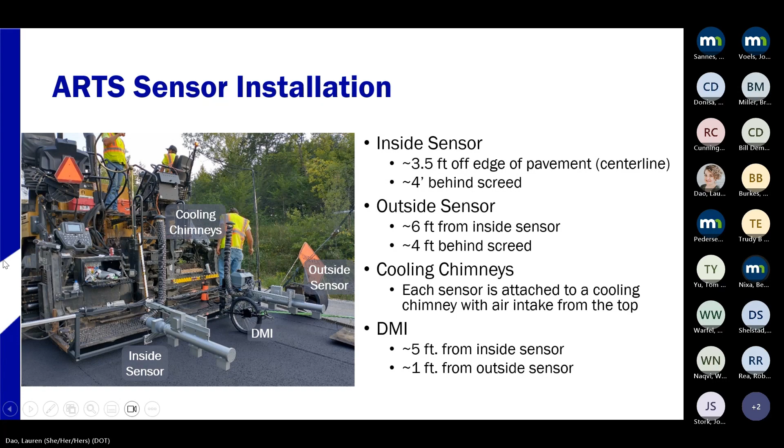There are two demonstration projects, one in Iowa and the other in Wisconsin. The project in Iowa was a county road in really bad shape in terms of surface condition. You can see the road is unraveled and patchy. It had a very hilly terrain, a lot of changes in elevation, and too many curves. The project in Wisconsin was a regular highway, a fairly flat terrain without too many curves. So we got to test two different types of projects here.

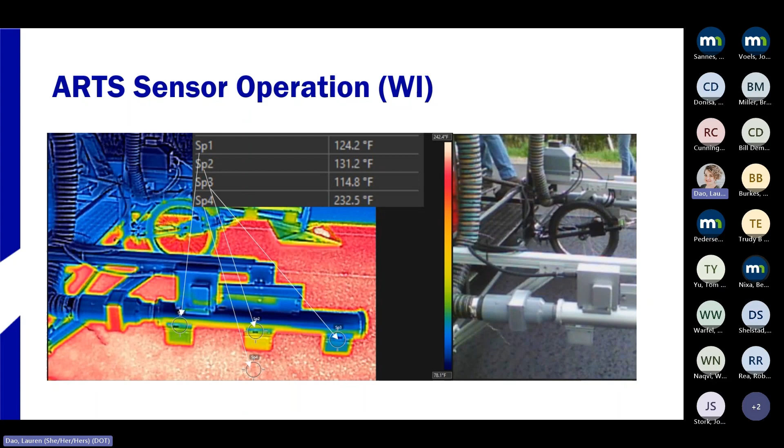Here is the same sensor in operation in Wisconsin. The asphalt temperature again is about 235 degrees, and the sensor housing reports a much lower temperature.

So post the paver operation, after the finishing roll is done and the asphalt is cooled down, we also profile the exact same location with a high-speed inertial profiler, just to compare the results of how it was behind the paver screed and how it turns out after the compaction is done.

This was a proof of concept project. There weren't multiple types of sensors tested or anything of that sort. It was just to see if we could get a system that could do real-time smoothness measurement for asphalt. And we must say that we did succeed in that.

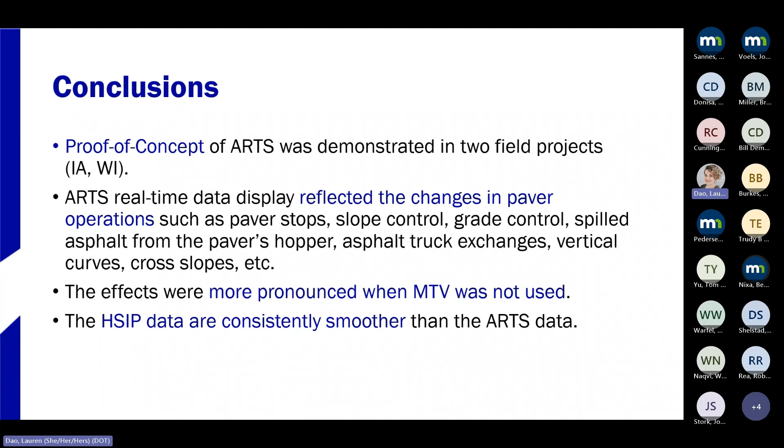Overall, we had good success using this setup. We were able to maintain the temperature inside the sensor below 120 degrees by cooling the system, and the installation process was also quite straightforward.

Some of you might have noticed that the DMI between the two sensors was leaving a small tire indent behind the paver screed, but that was only visible right behind the screed. Once compaction was done, we couldn't even see the line caused by that.

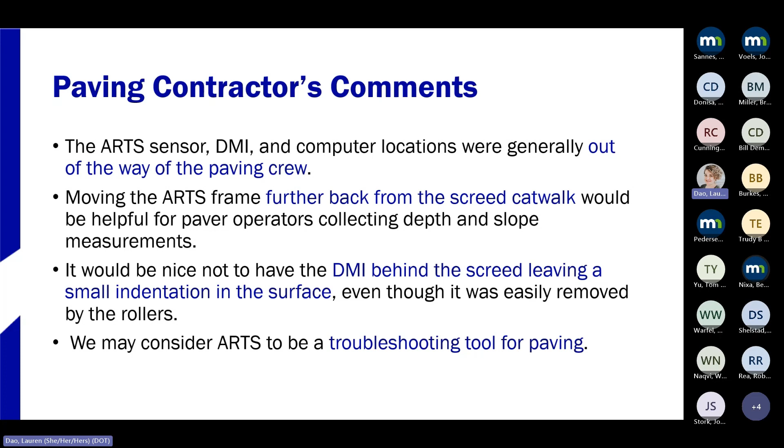Finally, the most positive feedback here is that they would consider this as a troubleshooting tool, that they are interested in seeing a real-time smoothness, and being able to tweak the paver operation is beneficial to them.

So for the future, the recommendations here are to see if we could put the sensor not on the screed but somewhere on the main frame of the paver itself. Therefore, we don't end up with issues with large screed movements affecting the results.

We would also like to do more controlled experiments with the new setup, where you change the tow point to see if that affects your roughness. You induce events such as paver stops or truck exchanges, or expanding or retracting the screed, etc., to see if that affects the roughness measurements in real time.

And finally, we would also want to make changes to the paver settings itself, to see how each change would affect the smoothness test.

More details about this project and the recommendations themselves can be found in the report, which is online right now.

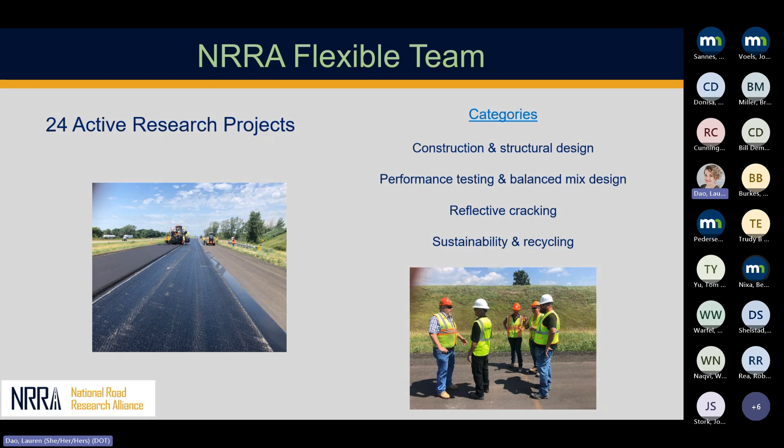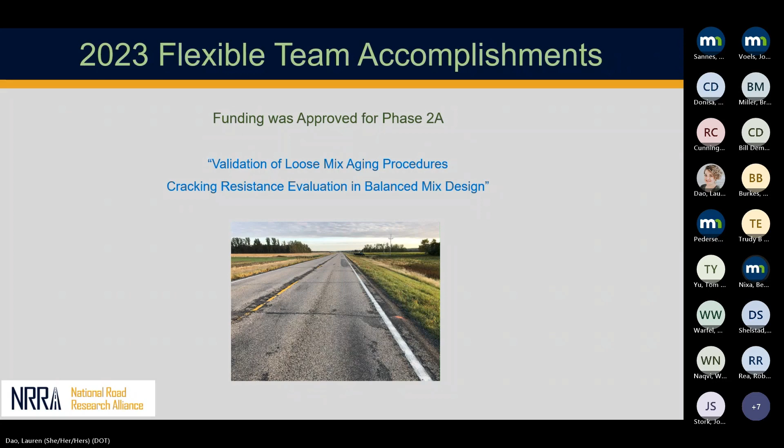I just wanted to say thank you to all the flexible members for all the good ideas that you've come up with and turning them into sound research. And then it gives us, the agencies, something to bring back to implement. That's really what it's all about. So I want to thank Jeff and Ben for their leadership, and Lauren for coordinating all the NRRA stuff we do and making the website so navigable, real easy to get through. And also want to thank Michael for his help, he greatly assists me in all my duties as the chair.

So now I'm going to introduce Dr. Sias. Dr. Sias is a professor in the Department of Civil and Environmental Engineering at the University of New Hampshire. Her research focuses on characterization and modeling of asphalt materials and pavements, specifically with respect to recycling, cracking, and aging, and on the impacts of climate change on infrastructure. Dr. Sias is a past president of the Association of Asphalt Paving Technologists and is editor-in-chief for Road Materials and Pavement Design. Her presentation is Mixed Rejuvenator Test Sections, Phase 2. Please welcome Dr. Sias.

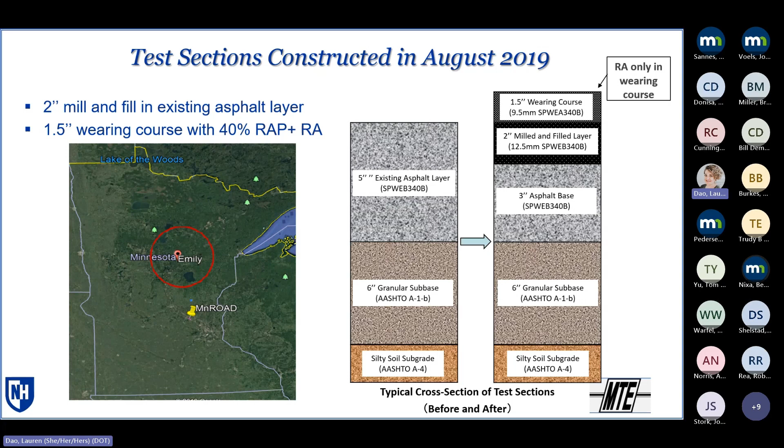This was all done with field produced materials. Test sections were constructed at the end of August 2019 up in Emily. It was a 5-inch asphalt layer with 2 inches of mill and fill, and then a 1.5-inch wearing course put down on top. The wearing course had 40% RAP plus each of these different 7 materials, and there were control sections that went along with it. So the RA section materials were just in that wearing course.

The section materials, again, there's 7 different RA products. These were added to 40% RAP mixes, and the dosage was determined by the suppliers. The target was making sure that with that 40% RAP, you met a PG minus 34 target. So those dosages were set, and again, the target was based on the extracted and recovered binder.

So we've got the 7 test sections with the 7 different products, and then there were 3 control mixes: a 30% control mix, which is the typical material used on the rest of the project out there, and then 2 40% RAP sections for the 2 different days of production that didn't have any rejuvenators in them. So 2 different controls - the typical one, and then the 40% to directly compare with those. You can see the dates of the paving on those.

Now, one thing to note when showing the results - as we got into the project, the results for the second day 40% control mixtures just weren't making sense. Something wasn't right with the material we had. All of that data is shown in the reports, but what I'm showing today, we've dropped out of the direct comparison. We looked into some of the production and plant information but couldn't figure out what had happened with these materials - obviously it wasn't a good comparator. So we're sticking with just the day 1 materials. You'll notice those aren't on here, but they are shown in the reports online.

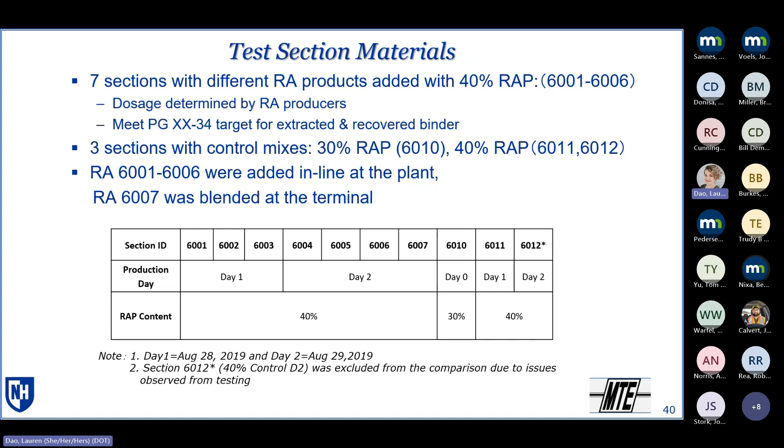In terms of the overall project tasks and status - again, all of these task reports are available online - we started with a literature review and interim annual updates for the first year, and after the second and third year materials, a summary of plant produced mixture testing and binder testing. The final report, we're in the process of finalizing, and that should be out for the TAP to review in the next couple weeks, and then published probably sometime early summer.

So in terms of the testing that was done, these materials had basically the kitchen sink thrown at them. We did almost anything we could that was available at the time looking at these materials. Some of the testing was done by various NRRA agencies, and a lot of the further testing for the aged materials was done at UNH. You can see a list of the different mixture tests that were completed, and then the binder tests - most of the binder testing was done by MTE, and again a lot of different binder tests were done on these materials.

Now, it wasn't just the plant produced material - we did a whole bunch of different aging conditions, so very comprehensive work in terms of the data we've collected here. For each of the test sections, we've got the plant produced loose mix, and that loose mix we tested in the reheated condition, 6 hours at 135 degrees C, and long-term aging, which was determined at the beginning of the project as one long-term aging condition.

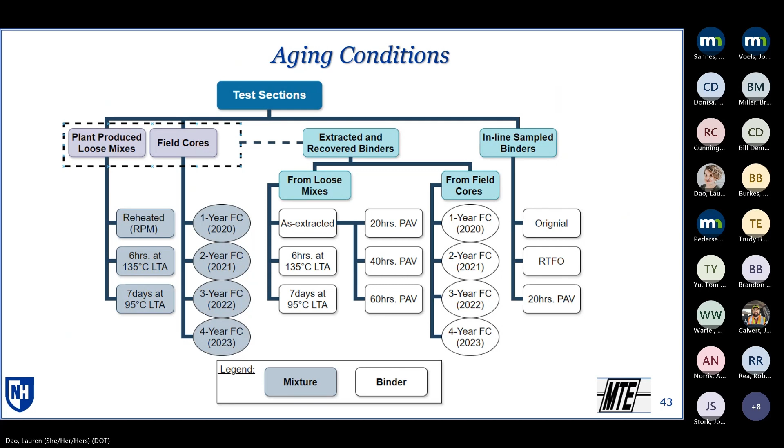So getting into some of the results, and again, not showing everything, but you will see everything in the final report. And if you're interested in some of the intermediate results, you can access them now online.

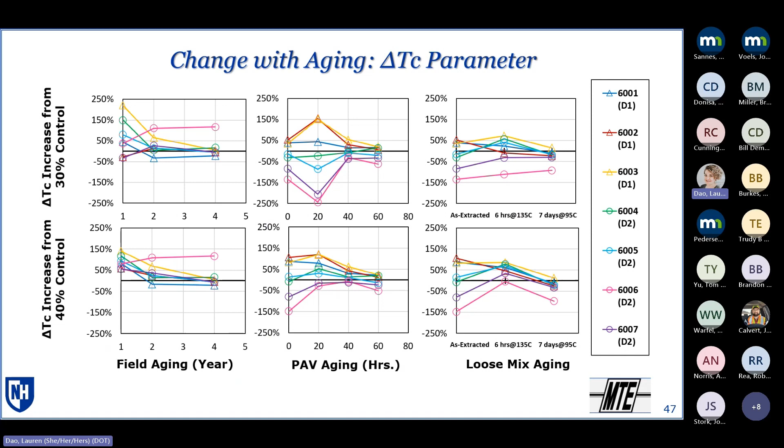Showing how these are changing with the aging, same setup here. With the field aging, things are staying relatively constant. With respect to the 30% control versus 40% control, you're seeing those coming a little bit closer. With the PAV aging, there are obvious trends in terms of what's happening, and then same with the extracted and recovered from the loose mix aging.

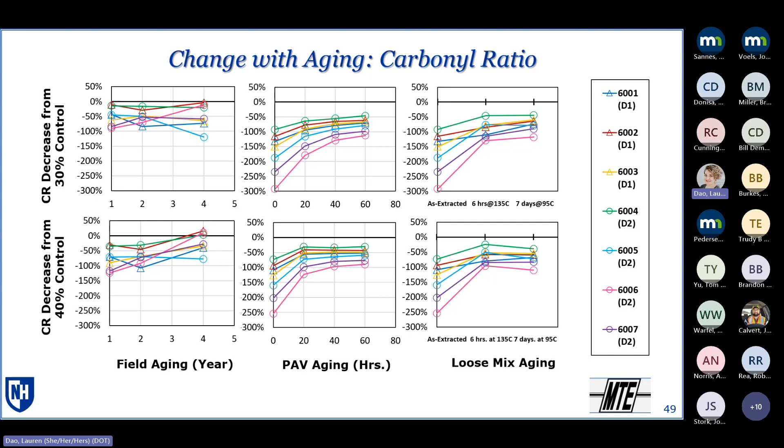So that's just a quick snapshot of some of the binder results. Some of the mixture testing results - we'll start with some of the rheological properties.

Looking at the Glover-Rowe mix parameter, this is very similar to the Glover-Rowe binder parameter, where it's a combination of a modulus and a phase angle value at a certain temperature frequency combination.

I will note with the mixture test, because we're testing some of the field cores, and the field cores have variable air void contents, to allow us to compare these, we did an adjustment of the rheological properties all to 7% air voids. So all of the lab testing was done at 7%, field cores variable, but we adjusted all of these to 7% to allow for a better comparison. So all of the rheological mix properties are adjusted.

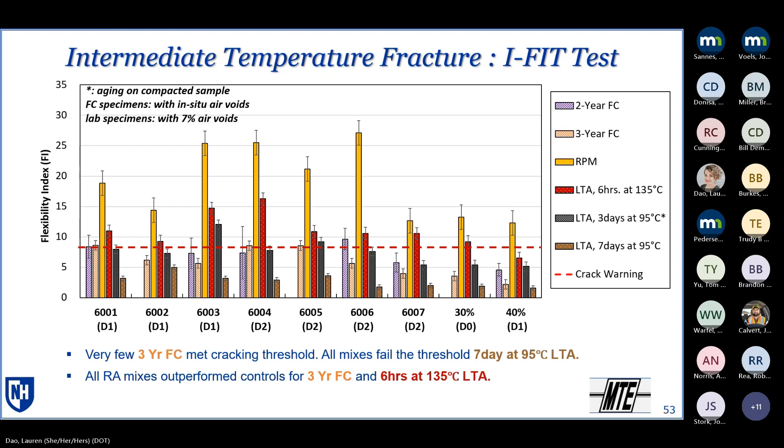You can see this specifically with respect to the control values, and as we're starting to get field aging, you're seeing bigger differences, and then again with lab aging as well.

Finally, the low temperature fracture test. This is a DCT test. The parameter I'm showing is not the fracture energy, but the post-peak index, PPI value, which is a combination of fracture energy and parameters from the post-peak slope. So it's more similar to what you're used to seeing with the flexibility index.

With these, we're not testing field cores, but we have the reheated plant mix and the two long-term aging conditions. The test temperature corresponds to the test temperature at the site location plus 10 degrees C. And again, all of these are 7% air voids.

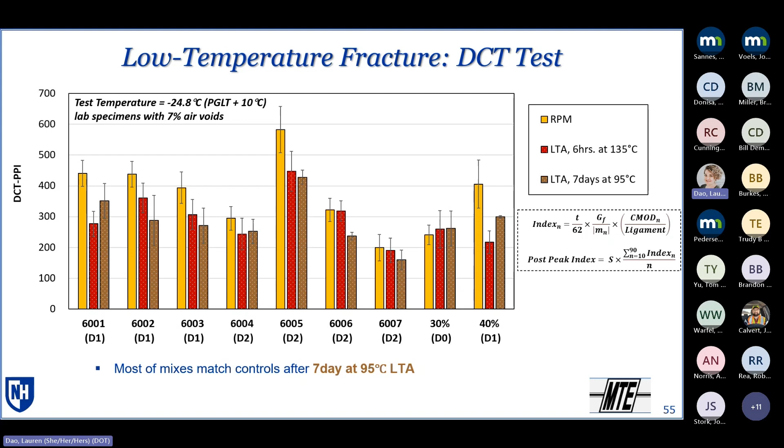You can see most of the mixes are either better than or matching the controls once we get to that long-term aging, and we're seeing what we expect in terms of the decrease with aging over time. You can see the plots here with respect to the 30% and 40% controls with those different aging conditions.

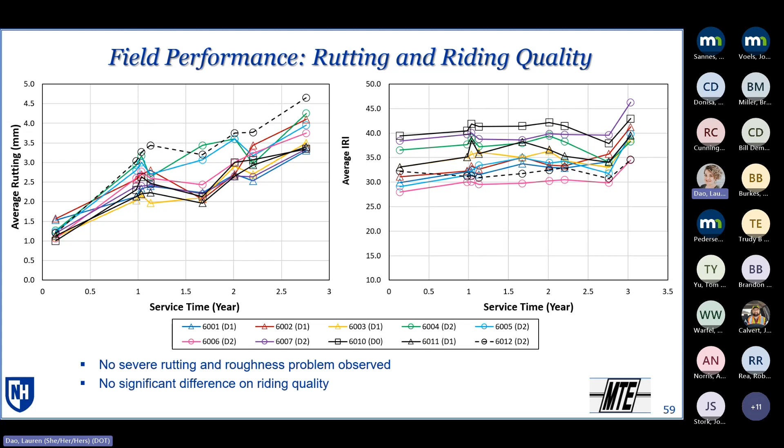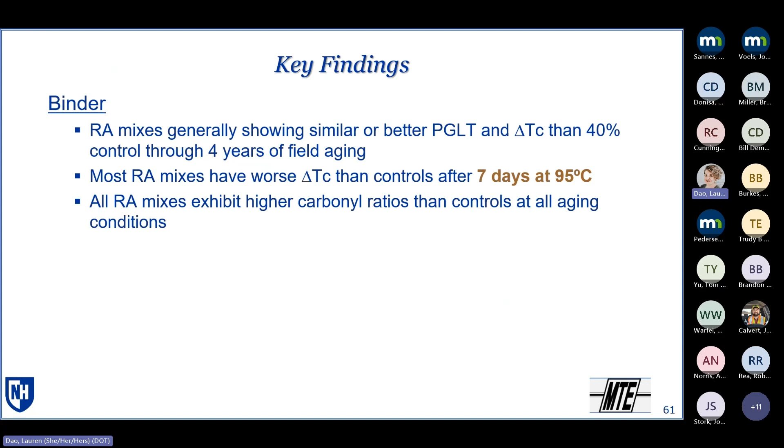Summarizing what we found so far from this phase of testing: from the binder testing, our RA mixes are generally showing similar or better PG low temperature and delta TC than our 40% controls through the 4 years of aging. When you look at delta TC, they're a little bit worse, especially with that longer term aging, and as I mentioned, they've got the higher carbonyl ratios for all the aging conditions.

From the mixture testing, most of those RA mixes are still showing better performance for the 4-year field cores and for the 7-day aging. For intermediate cracking thresholds, once we get to those longer term aging conditions, everything's basically hitting the bottom. Generally those RA mixes have better values than the controls, but once you're below the threshold, nothing's really any good. The RA mixes initially show better low temperature properties, but that's diminishing with increased aging.

For field performance, all the mixes are showing better cracking performance than our 40% control, a little bit worse than the 30%, but again, not a whole lot happening out there, so we really need to keep monitoring these over a few more years to see if we start seeing any differences distinguishing field performance. In terms of looking at the aging protocols, this wasn't a main objective of the study, but a side objective, since we have all this data, is what represents what we're seeing in the field.

That 7 days at 95 degrees C definitely is more severe than what we've seen so far with the 4-year field cores. The 6 hours at 135, based on the different binder properties and mixture properties we're looking at, is really looking for materials comparable to 3 to 4 years of aging in the field, and that's based on the top half inch of the field core.

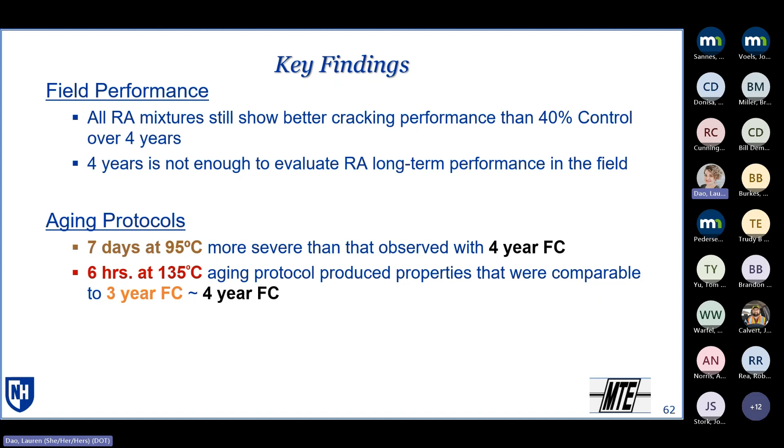So in terms of what we're looking at going forward, we're continuing monitoring into the next phase of this project. We've got a few more years of field performance monitoring, collecting the field cores, continuing to do the modulus fatigue testing. We're going to be collecting additional cores so we can do additional IFIT fracture tests on these field cores, and then continuing to do some analysis. It's really a fabulous set of data that we've got with the binder and mixture testing to really look at lab and field correlations.

And that's it, that's what I've got as a summary. So thanks for your attention, and happy to answer any questions that folks have.

Any questions? I'll take it. Great, thank you Joe, very good presentation. I think up next now is Raul, I believe. Geotechnical. You, sir.

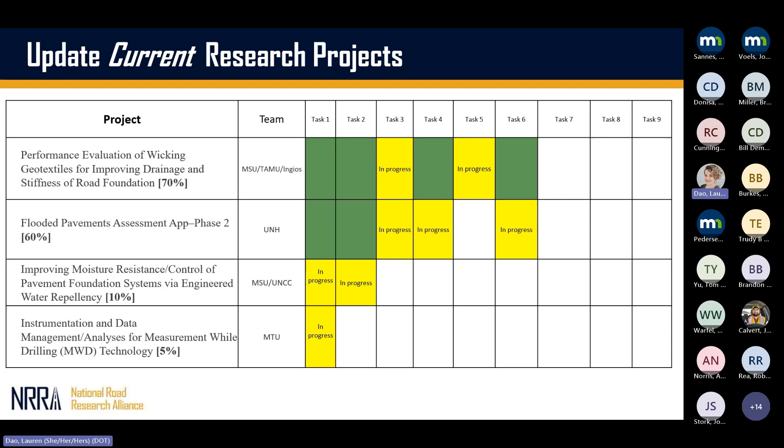The third one, on the use of water repellency, I have a few slides on that project, but I was relying on Professor Daniels being here. I'm going to put him on the spot.

So I was working on getting these slides, and I saw this chemistry. I was very bad at chemistry in high school and college, and I'm still bad, so I'm not going to pretend that I know exactly what this organosilane and all these connections mean. But anyway, the idea is to modify the water to make it hydrophobic and to have this coating in your base material that will allow the water not to penetrate into your pavement system. Professor Daniels, do you want to make a few comments on your project?

These slides, 3 slides. I'll be surprised which slides are there. So it's sort of like ad lib as we go.

Well, I want to be brief. I know we have Fyaz coming up, plus there'll be an opportunity during the tour. So maybe I'll say enough to entice you to jump in the car and come to the MnROAD facility and help us troubleshoot, because we also have some field relevant activities going on in terms of premature pavement distress connected.

But anyway, the general concept is, as Raul says, keeping water out of the system, and there's lots of different ways of doing that. Our research vision generally is to be manufacturer agnostic and focus on the organosilane chemistry itself. So much like you have a whole potpourri of geosynthetic manufacturers out there, likewise there are a lot of producers of organosilane. We do have a particular product we're using out there, but everything we do is intended to generalize how you quantify hydrophobicity.

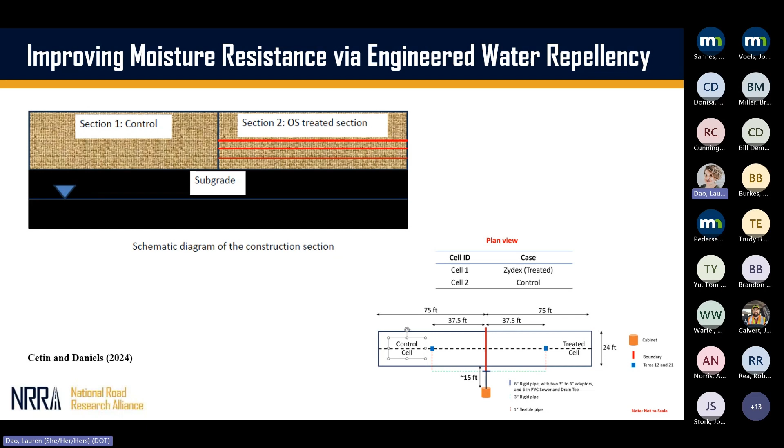You don't have to wait any particular period of time. It ought to dry on its own. You can do that, or what we did here, which is a little bit more cost effective, is simply spray it. This is analogous to some kind of tack coat, although you're not actually sealing it, you're only treating the individual particles.

And then you can see this is what that actually looked like. So here's our treatment of the 3 layers, and then we have instrumentation in between. And I'm going to take my cue on how quickly you advance those slides as I exit stage left.

But hope to see you this afternoon. We did practice this, so this is awesome. Thank you.

The other project that I'm very excited about is on measuring while drilling, or MWD. What I'm excited about is it's a hot topic right now. Federal Highway is promoting this practice. The idea, for those of you not familiar with this, is basically instrumenting your geotechnical rig so it senses more.

So you're more efficient during the drilling process. You may argue that drillers have so much experience, and they know, they feel it, and they can sense when you're doing a good job, when you're in a specific formation, if you're having trouble drilling. They don't know this sensing.

But I'll argue that as a designer, this data coming out from this additional sensor is going to help us out, really assessing strength parameters, stiffness parameters, non-uniformity across that. So that's really, I think, what is the game changer with this technology, measuring while drilling.

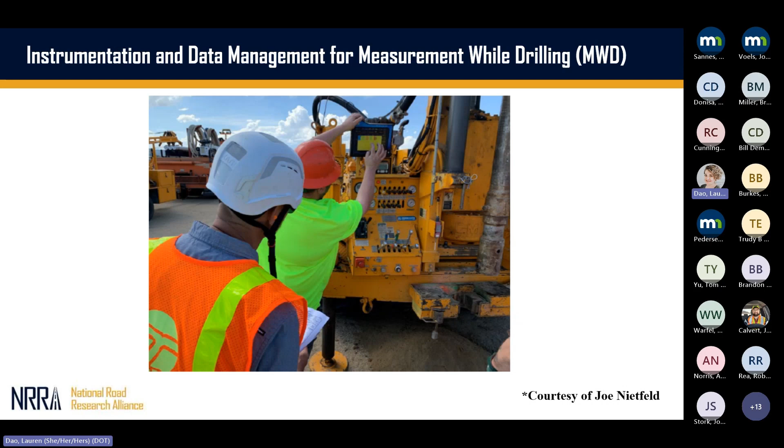So we're going to have now several more parameters coming out live during the drilling process, and also the operator will be able to see with that nice device there what you're getting coming out of this loop system with your rig.

So you're going to have sensors measuring torque, how much fluid is coming in. So you know if you're getting lost, if you have any voids, you see if you've had loss of fluid, you're going to have an actual measurement of that as you go along. So that's very powerful, I believe.

So you're going to have profiles that look like that live, but you're also going to be able to just get live all the strength parameters, on shear strength, tip, friction angle, stiffness, all these geotechnical parameters, you're going to be able to get it live as you go along.

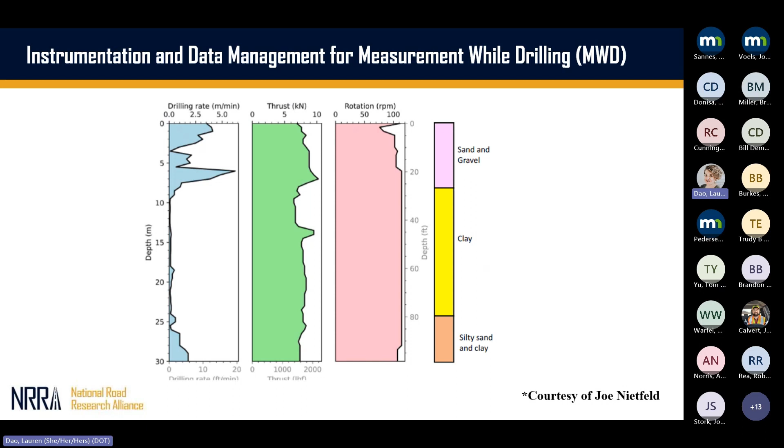And one of the benefits that users so far have mentioned about this is that it will allow us to be more accurate about stratigraphy of your subsurface conditions. If you have more questions, you can ask Joe Nietfeld at the back. He's one of the members of the geotech section leading the implementation of measurement while drilling in our geotech section.

So although in the table that I showed you earlier, it only shows 5% progress, Nebraska DOT is leading this work. The TL is Glenn Nicholas from Nebraska DOT and also Alex Silvey. They're doing an amazing job, we have met so many times. So even though it looks like 5% progress, we spent a lot of time trying to select the right system to make sure that all the alliance members are satisfied with it and it's the best for the investment.

Right now we have 2 systems available for doing that, the measuring while drilling, the Jean Lutz and the LIM. Based on several evaluations that we have performed, Nebraska DOT decided to go with LIM. We hope that we can use that here and meet that, and that the other members of the alliance follow whatever we get out of this project in terms of guidelines for the use of this.

Thank you, Raul. Good morning, everyone. Today I'm going to present about one of the new kinds of geotextile called the wicking geotextile and how it can improve the drainage and also the stiffness of the road foundation, especially in the wet freeze climates.

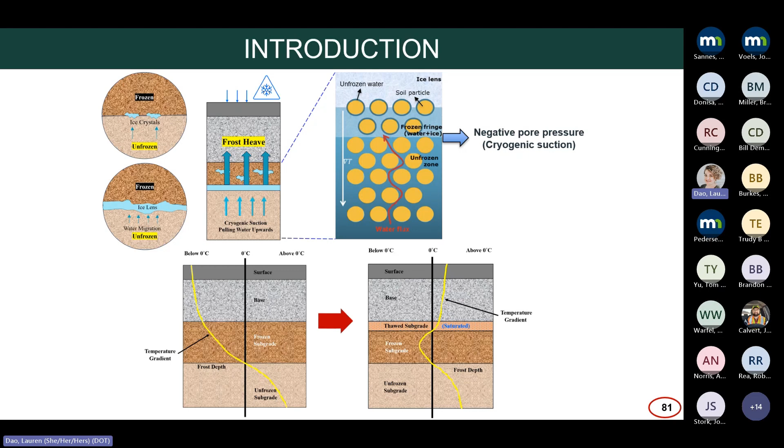So that's when, if a truck goes over it, we get damage in the pavement—that's why we have spring load restrictions. Because of this we see potholes, cracks, rutting, and frost boils. We also need to impose spring load restrictions, which is a concern for the economy and the trucking industry.

From this background, we understand there are three conditions for frost action: freezing temperature, frost-susceptible soil, and water supply—or, in more memorable terms, as Joel Ulring mentioned in his famous MnDOT video about frost damage, the 3 W's: water, winter, and wicking. Wicking means soil that sucks up more water.

So how can we solve this problem? Since water is the main driving factor, as Dr. Daniels mentioned, one concept is to stop water from the groundwater table using a water-repellent chemical. Another concept is that during thawing, we take the water out with the help of a better drainage system or some kind of geotextile.

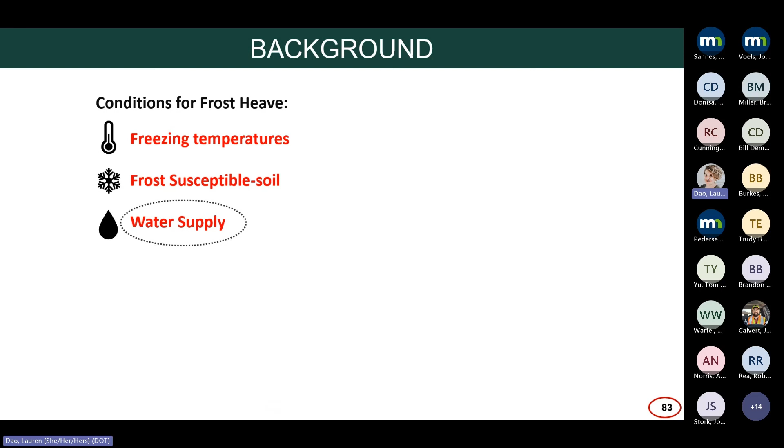So the concept here is using a new kind of geotextile called the wicking geotextile. It has black yarns, which provide reinforcement, and blue yarns, which are microfilaments with smaller widths and multiple channels that can suck water via capillary action from the pavement.

After sucking in the water, it can carry the water out of the pavement. If the termination end of the geotextile outside the pavement is in a drier environment compared to the inside, you get a suction difference between inside and outside, and because of that suction difference, water comes out of the pavement. That's the working mechanism of this geotextile.

So this geotextile performs normal functions just like other geotextiles—it provides reinforcement, confinement, and filtration. But the additional benefit it provides is moisture management and drainage.

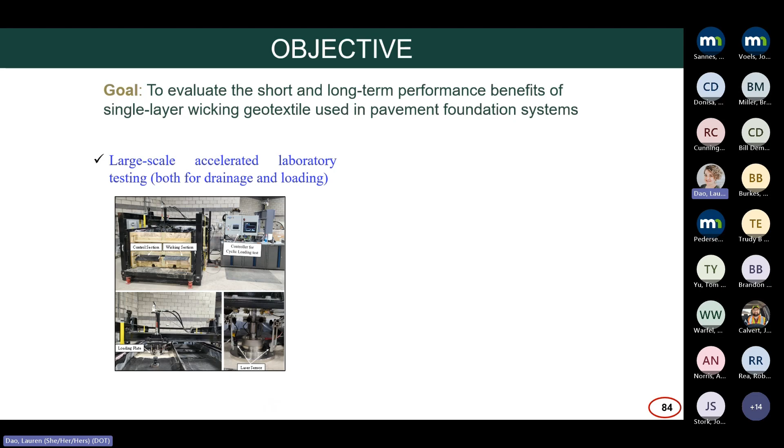The objective of this project is to evaluate short-term and long-term performance. For short-term performance, we're conducting large-scale accelerated laboratory tests. For long-term performance, we constructed test sections on MnROAD—two test sections, built in June 2022—and we are currently monitoring their performance.

So for monitoring the performance in the laboratory, we constructed a large test box. The length of the box was 6 feet, the width was 31 inch, and the height was 38 inch.

We had 2 test sections, similar. In one test section, we had the control, no geotextile. In the other test section, we had the wicking geotextile. We are simulating the similar environment and similar material we have at MnROAD, the sub-base materials, base materials, and the subgrade materials. And we have moisture sensors and thermocouples to monitor the temperature flow and the moisture, the way the wicking geotextile is taking out the moisture.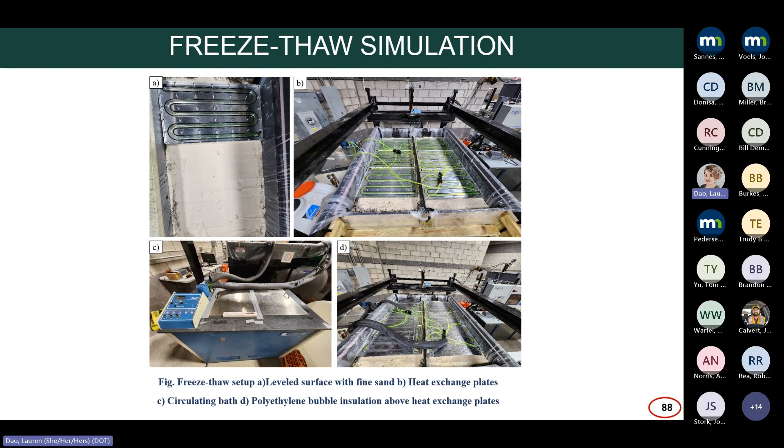So for doing the freeze-thaw simulation, we use cold plates, and these cold plates are connected to the circulating bath. The circulating bath has ethylene glycol, which will not freeze even at -40°F. So that circulating bath liquid, the ethylene glycol, is going on top of our box in those cold plates, and with the help of this, it's freezing the system.

And this is the total setup. So we are simulating the exact environment, like we have a lower groundwater table. So we have the water supply tank, which is going below our soil. We are simulating the groundwater table with the help of that.

And as I mentioned, we have the water collection container. The geotextiles are coming outside of the box, and we want to see visually whether it is draining any amount of water or not. So those water collection containers are for seeing what is the amount of water coming there.

And then we conducted the accelerated cyclic loading test. So this is our testing sequence. We did first the freezing simulation, then we did the thawing and drainage. Thawing and drainage is happening at the same time. Then we simulated the rainfall also, then we provided time for drainage, and then we conducted the accelerated cyclic loading test.

So the accelerated cyclic loading test we conducted at the Ingios Geotechnics setup at Dr. White's lab. This setup has a great advantage in that we can do random sampling of the load, just like the traffic in the pavement, where we have a small car going, then a large truck coming. So the traffic distribution is random, not going from low stress to higher stress.

So it's very random. We can do, like, 2.5 PSI of load applied first, and then maybe 43.5 PSI applied. So this is the random distribution. Next, 20 PSI is applied. So this is the random distribution. And with the help of this random distribution, we can conduct a probabilistic analysis.

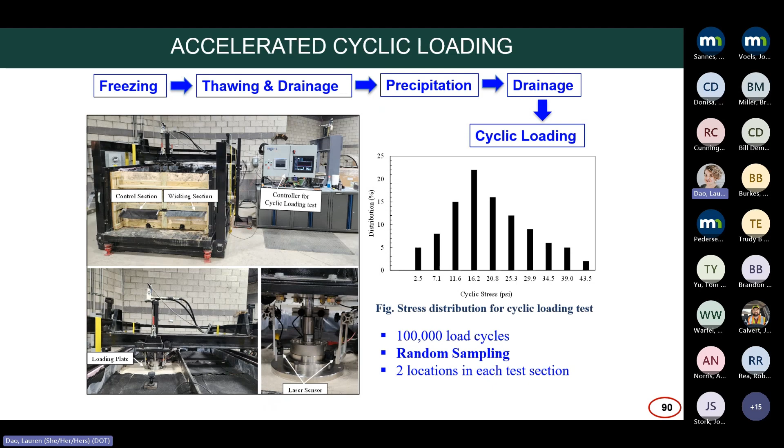So here we have the loading plates. With the help of a 12-inch plate, we are applying the loads, and we have the laser sensors, which are monitoring the deflections.

And why is it happening? So we were collecting water in those water collection containers. What we observed is that in those water collection containers, visually, we could see that in the wicking section, there were around 11 pounds of water. And in the control section, no water was coming outside of the system. So that's why we're seeing that reduction in moisture between the wicking and the control section.

After all these simulations of drainage, and before conducting the cyclic loading test, we took moisture cans, because the moisture sensor gives the moisture content at only one location, but we wanted to know the spatial distribution of moisture. So we took moisture cans from 18 different locations in each test section. We divided the test section into grids and took out moisture content at different locations to understand the spatial distribution of moisture.

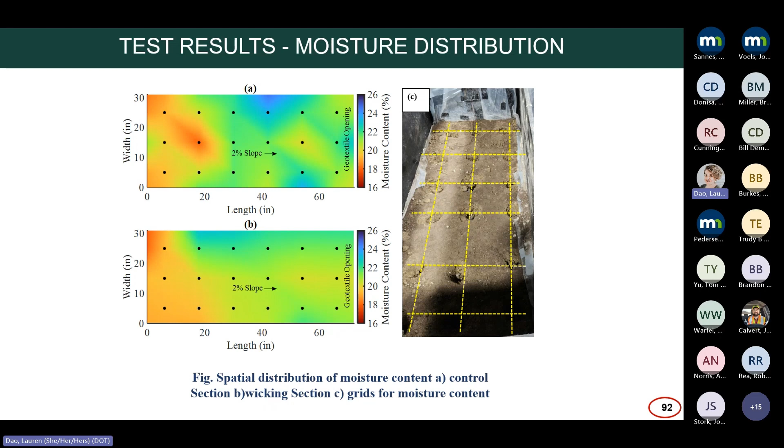As you can see, the top one here is the control section and the bottom one here is the wicking section. In the control section, you see more variation of color, meaning there is more variability in the moisture content. On the other hand, in the wicking section below, you see less variability in the moisture. So that shows the benefit that the wicking section is maintaining uniformity in the moisture content. And these are the test results from the cyclic loading test.

Next, I will move on to the field test section. We had two test sections constructed in the June 2022 construction season - one control and another wicking section. Both test sections were 250 feet in length, and these test sections were also part of the intelligent compaction project and perpetual pavement project. Raul already talked about that.

What is the importance? I will show some results and discuss more on those - the importance of understanding and the importance of collaboration between the teams. So this is the layout of the cross section of our pavement section.

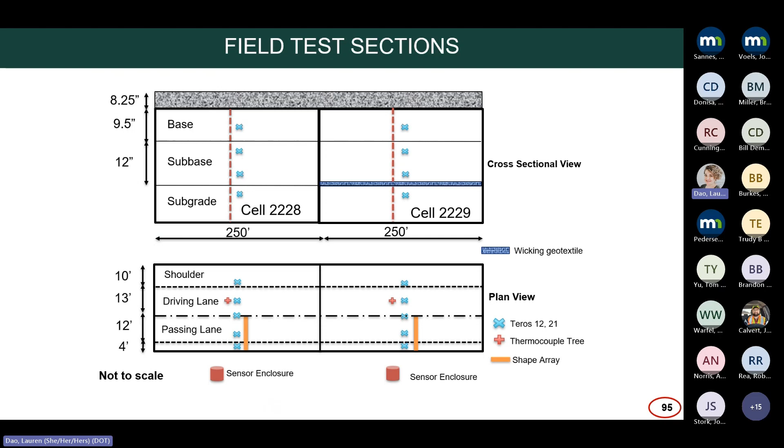We also had a new kind of sensor, the shape array sensors, which can give us the deformation in our pavements. So this is how the wicking geotextile was laid out at the interface of the subgrade and the subbase.

Initially I mentioned how the wicking geotextile works - the conventional design or manufacturer recommendation is that you need to daylight the geotextile with a slope on the sides. But that's not always feasible when you have flat pavements like we have on the main road - it's not possible to daylight the geotextile there, and you would need to excavate a huge amount of soil.

So the design procedure we followed is that we need a drier environment - the termination end of the geotextile should be in a drier environment. To create that, we excavated a trench in the shoulder with a width of 3 feet and depth of 1.5 feet, and filled that trench with gap-graded aggregates. The idea is the gap-graded aggregates will dry fast, giving that drier environment compared to the inside of the pavement, and the wicking geotextile can drain the water because of that suction difference.

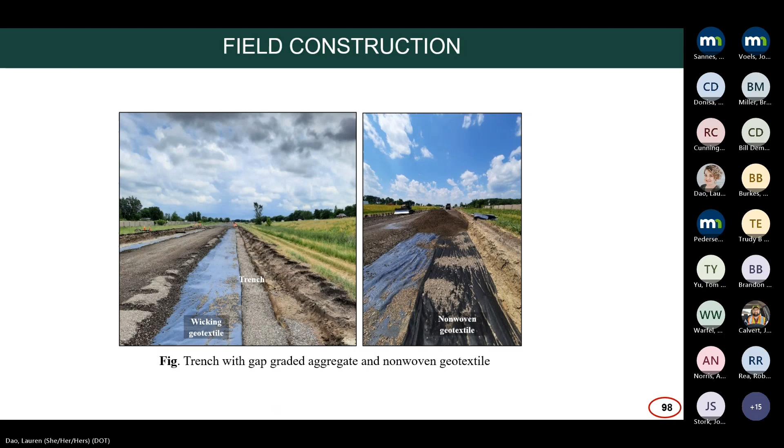Above that gap-graded layer, we put the non-woven geotextile so that there is no intrusion of fines, and we can get that layer dry fast. This is the sensor installation, and we installed the shape array sensor.

So this is the sensor installation. As I was saying, we have 5 sensors along the width of the pavement - the moisture sensors and matric potential sensors.

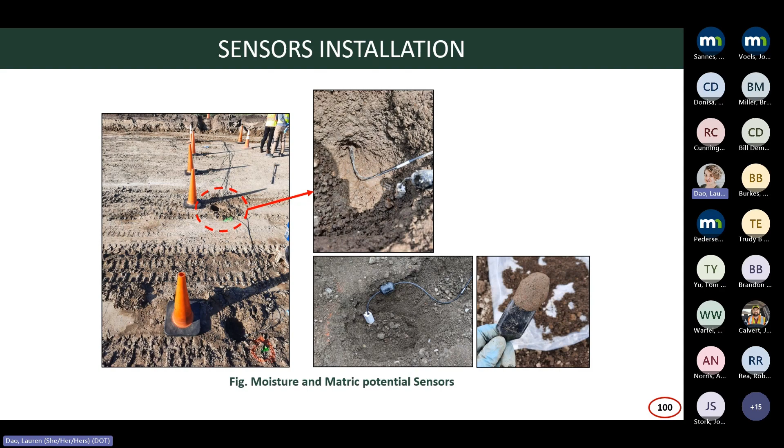And these are the field tests during construction. As I mentioned, this was part of the intelligent compaction project. The test sections were divided into finite grids, each 25 feet in length and 6 feet in width.

The whole MnDOT team conducted the nuclear density gauge test and the DCP test. The UTEP team, led by Dr. Soheil Nazarian and Dr. George, conducted the IC mapping and LWD test on these test sections.

From these results, both test sections performed well and met the criteria for stiffness. But were these two sections similar in terms of comparison? That's important if we want to compare the stiffness of one section to the other. We will see this in our results.

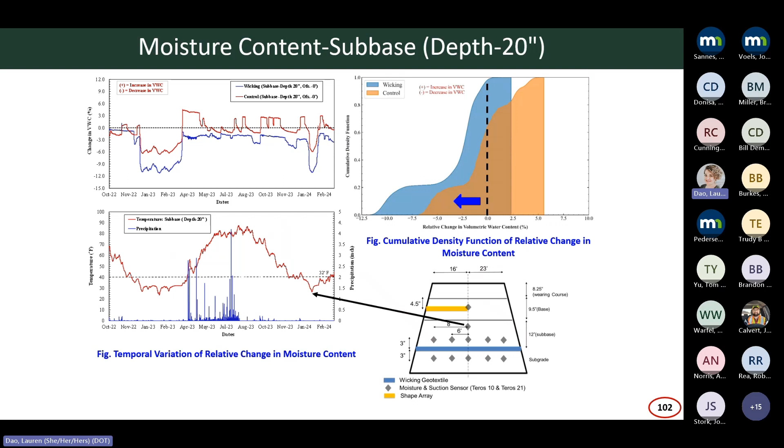This is the probability distribution graph of the relative change. As you can see at the bottom, these peaks form a narrow line, meaning the moisture content always remains more uniform in the wicking section compared to the control section. That middle peak is because pavement always wants to come to its optimum moisture level.

On the left, those peaks are due to freezing, because during freezing we have lower moisture content. I will discuss more on that in the next slide.

The other peak you see here occurs during rainfall, where moisture content increases. But if you look closely, that peak only appears in the control section, not in the wicking section. This shows the benefit that during rainfall events, we don't see higher moisture content trends in the wicking section.

So here are some more insights on the distribution curve. As I mentioned, the middle peak represents the optimum moisture level. But what is the one on the left, during freezing? What happens during freezing?

On the x-axis, I have the time during December, January, and February, when moisture content goes down because water converts into ice. As moisture content goes down, the matric suction increases. This is the driving factor for freeze-thaw damage: as suction increases, it pulls water from the groundwater table, causing more water and more damage in our pavement.

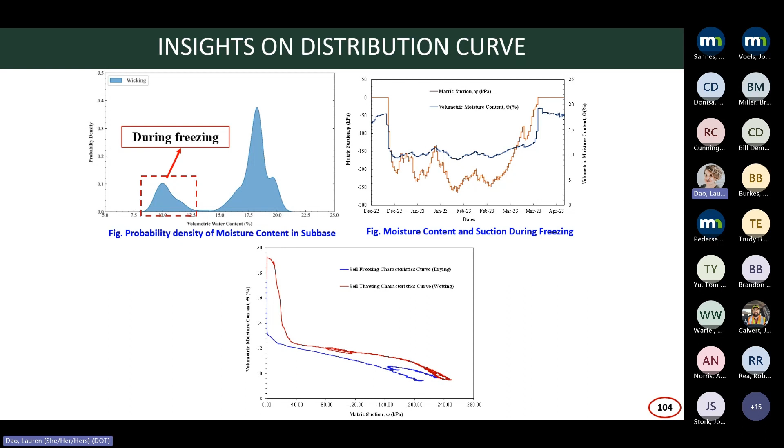With the help of finite element modeling, we can reduce the number of test sections if we can validate the model with the real-time data in the pavements.

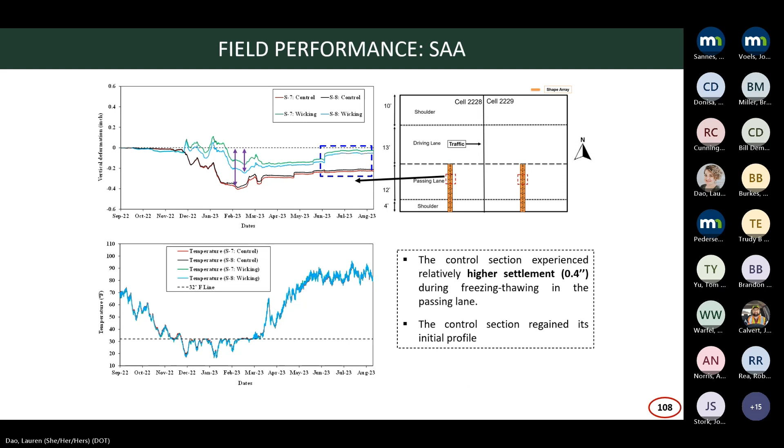After that, we conducted the FWD test. Thanks to Jacob for conducting this test and sending us the data.

For the FWD test, as you know, we have 3 drops, and we are plotting this deflection basin with the second drop, 40 kilonewton load, 9 kips. What we see here is that in the control section we have less deflection in terms of the FWD results. That's interesting, because the wicking section was draining out the moisture and showing us less settlement, but in terms of FWD we see a variation in the D0 of 10.2%, with the control section having less deflection from the FWD results.

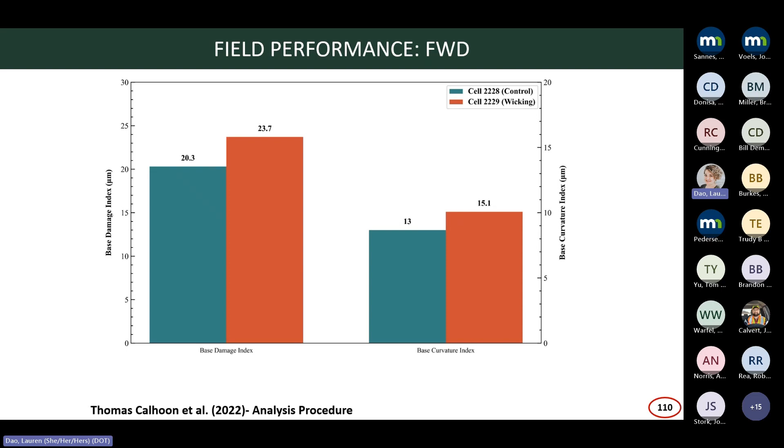So we wanted to understand the results, and we went back to our initial conditions, the intelligent compaction results. Thanks to Dr. George and Dr. Soheil Nazarian's team for conducting this test and providing us with this value.

So we see the compaction meter value on the y-axis for the different materials. The compaction meter value from the intelligent compaction is an indicator of stiffness.

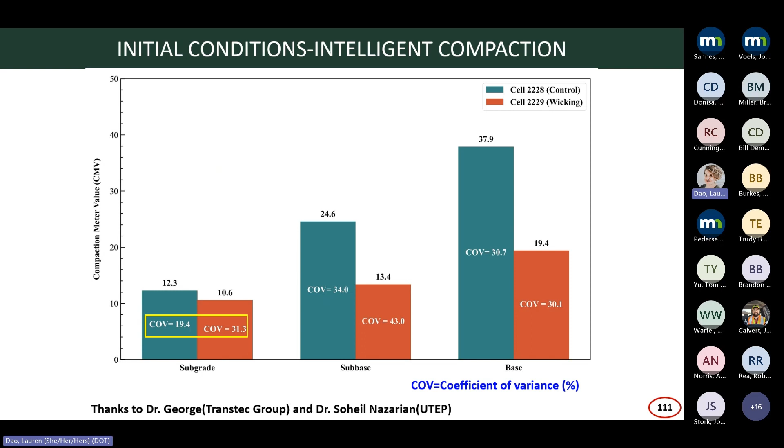We're seeing a lot of variation in the coefficient of variance between test sections. My green section here is the control section, and the orange one is the wicking section. We see a variation of around 11% between these two test sections, coefficient of variance of 19% in control and 31% in the wicking section.

So that's actually contributing. If we look at the mean value of these stiffness parameters in the subbase, there's a variation of 46% between the control and wicking sections. Control was way higher, stiffer, compared to the wicking section during construction, during the initial conditions.

That's actually impacting the FWD results, where we see a variation of 10 to 15%. Because the wicking geotextile is draining out that water, it brings that 46% variation down to 10 to 15%.

If we had just compared the data without considering those initial conditions, we might say this test section isn't working. But when we bring in this parameter, the 46% variation is brought down because of the drainage. So it's very important to have initial conditions mapped, so we can understand the variation in initial conditions.

When comparing test sections, one thing is meeting the design criteria, and the other is that when we compare both test sections, it should be orange to orange, not apple to orange. We want to compare orange to orange, but the problem is that nature is involved and we cannot control all of this. So the mapping helps us understand the results from that perspective.

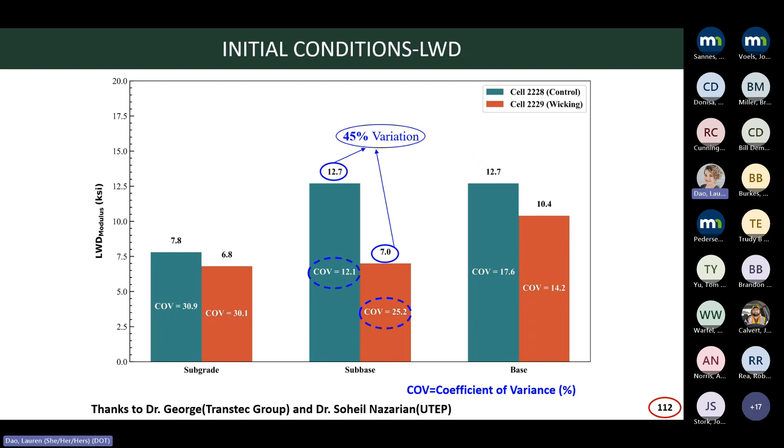Those mapping results also match the LWD spot test results. We see the same variability in coefficient of variance — huge variation in the wicking section, 25%, versus 12% in control, and similar variation in stiffness, 45%.

So the conclusion from our study is that, as seen from the moisture sensors and spatial variation in moisture, the wicking geotextile is draining out the water. During spring thaw settlement, the ShapeAccelArray sensors showed the control section having more settlement.

But when we conducted the stiffness test with the FWD, we observed that the control section has more stiffness, or less settlement, compared to the wicking section — a variation of 10 to 15%. In the initial condition, there was a variation of 45%, which is impacting that 10 to 15% variation. With time, the wicking geotextile is bringing down that variation.

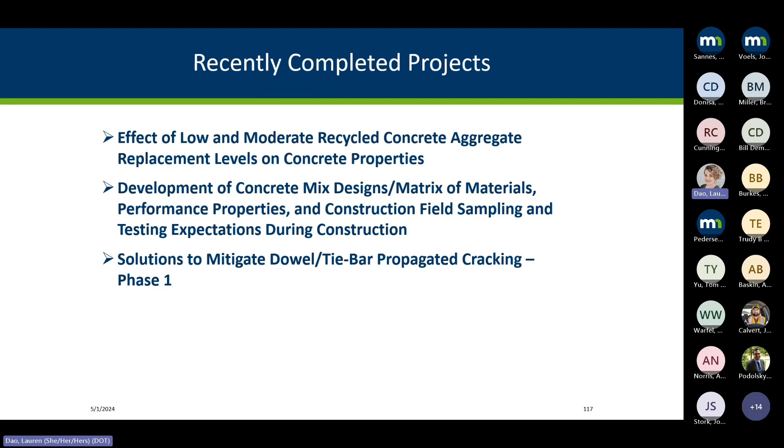Now getting into some active projects - one is nearing completion, about the development of a pavement-specific structural synthetic fiber. For a long time we've been using fibers in our thin concrete overlays to help keep them from shifting around or transferring load across joints since we don't have dowel bars. This is phase one of the project, about understanding the forces that a fiber would have to handle to help transfer load across these joints.

Right now, pretty much what the industry uses is fibers that come out of the flooring industry. What we're discovering is our loadings are far different than anything seen in an industrial building. So far, the fibers have been helping keep the panels from shifting around on the longitudinal joints, but as far as transferring load, they're not suited to what we're looking for.

The next project is alternative cementitious materials. This is part of three projects involved with the 2022 concrete sections we built, and we'll be hearing an update from Prashant shortly after I finish. Another is alternative pozzolanic materials, and the other is the use of carbon dioxide, carbon injection. These are three ongoing multi-year projects designed to monitor what's happening in those new sections and understand whether these materials work and will benefit our sustainability efforts.

Before we get started, I wanted to mention the project team. Applied Pavement Technology - we are the prime contractor on this - and we have NCE, WJE, and Larry Sutter working with us on this project. I'd also like to acknowledge the TAP members: our fearless leader Tom is right here, and several other members who have been very helpful in reviewing documentation and providing valuable feedback. I didn't put their names here, but I also want to acknowledge Jacob and Rob, as they provided a lot of information during construction of the test cells, and they were really great.

All right, in terms of objectives, what did we want to do with this particular study?

The first aspect was really determining what do we need to consider when selecting some of these alternative cementitious materials, particularly for pavement applications. One thing we did not want to do is have the batch plants change the way they operate. We did not want any special handling, mixing, or special requirements for these materials. And number two, we did not want to change the way pavement construction operations are performed, the typical slip form process, no modifications, and can these materials be used for that.

And then what testing do we need to do for acceptance during the paving and for acceptance requirements? Really, there are no special test methods that have been devised so far that are specifically designed for alternative cements. What we've been doing is use the existing test methods and maybe make some minor changes along the way. But really, there is no special test method that has been designed just for alternative cements.

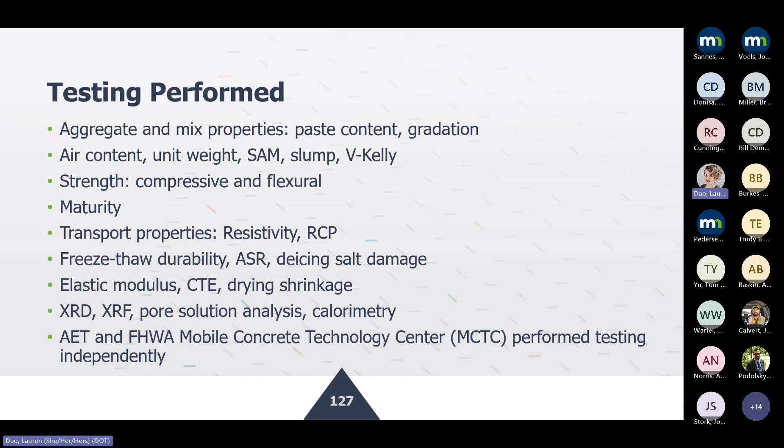I'm not going to show you the test results from everything, I'm not going to bore you with everything. I'm going to focus on the field results, and a little bit of the lab results. Looking at fresh concrete properties, again I'm not going to go through all the cells in this table here. We looked at air content, the typical method, and then we also did the super air meter.

But overall, properties were very similar to what you would expect from your typical conventional paving mixture. This was the testing performed by the Mobile Concrete Technology Center.

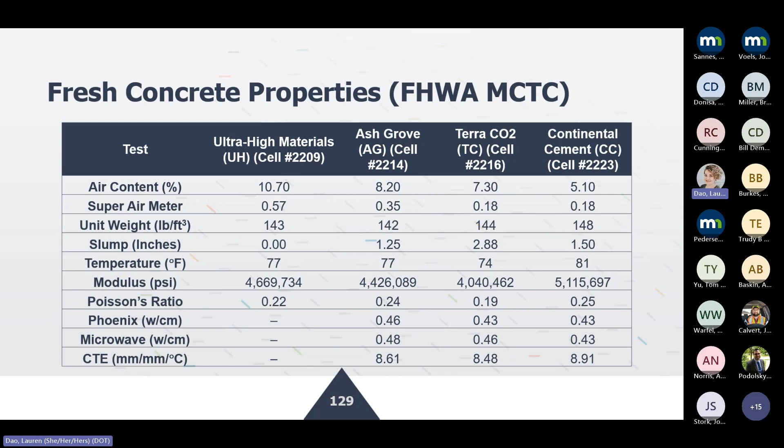Looking at the modulus values, very similar, in the 4 to 5 million PSI range. The Poisson's ratio was also around 0.2, typical of a paving mixture. Quickly looking at compressive strength results, some materials have a slightly lower rate of strength gain, particularly the one at the bottom, I believe that's the Terra CO2, which had about 35% replacement, but overall nothing out of the ordinary.

Looking at the flex strength, one glaring observation is the ultra high, which goes up and down. That's mainly because they could not cast proper specimens. So I would take the results for ultra high with a grain of salt, because the mixture received was very stiff and they could not make proper specimens.

Quickly looking at the RCP test—people still do the RCP test, though it might become extinct in a few years, maybe replaced by bulk resistivity testing. But anyway, this test was performed, and as you can see, for ultra high, very low permeability, corresponding with high resistivity, as I'll show on the next slide. Overall, all these mixtures are within the low to very low permeability range.

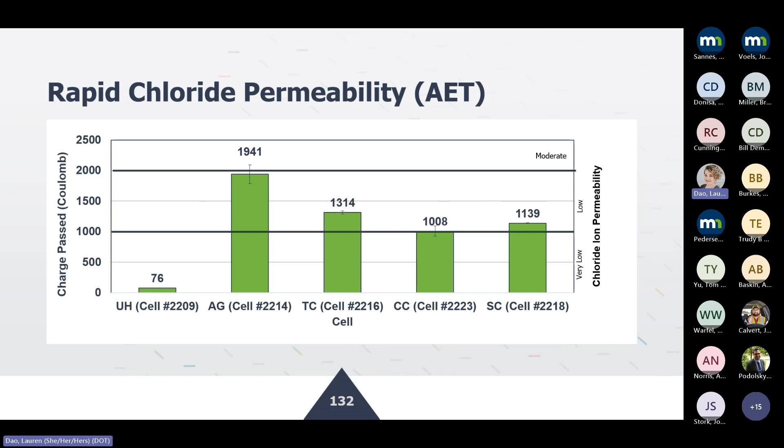Looking at the bulk resistivity testing, as expected with ultra high, which had very low permeability, you'd expect high resistivity. In general it's probably a magnitude of scale away from the other materials. But overall, all these materials would exhibit very low permeability, which should correspond to long-term durability aspects.

So in general, from the laboratory testing performed, we saw that the fresh concrete properties were really comparable with conventional mixes. The compressive strength values—they also did 56-day values—exceeded 4,000 PSI for all materials except Terra CO2, which was close to 4,000 but slightly less.

As you saw for ultra high, there was a lot of variability, probably due to potential contamination at the batch plant, and also the failure to add the viscosity modifiers and water reducers in some of the initial mixtures, which resulted in a lot of variability.

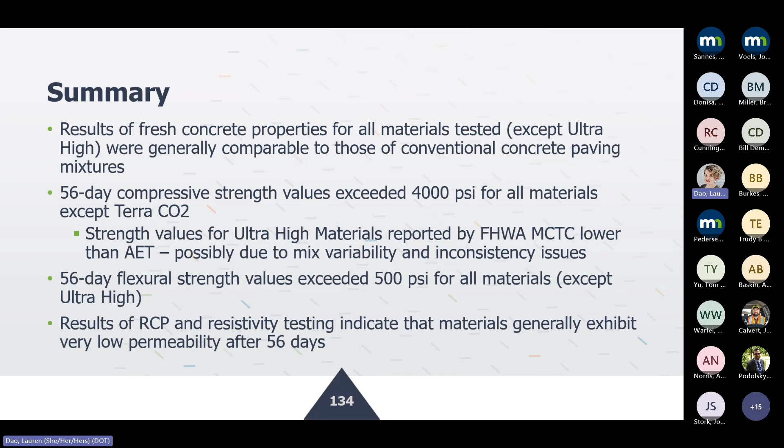There were no issues with the 56-day compressive strength values for most of the materials—they exceeded 4000 PSI, well within the MnDOT requirement. And as you saw on the previous slides, the RCP testing and resistivity testing showed that these materials have very low permeability after 56 days.

Quickly looking at the constructability evaluation, we looked at a lot of aspects to evaluate whether these materials are really suitable for typical paving construction. This information has been published in the report available on the NRRA webpage. We looked at material handling aspects, workability, equipment used to place the materials, ease of finishing and texturing, and whether any adjustments were needed in the field. We did have to add some extra water for some of these mixtures to achieve the required workability, but all that information is documented in the report on the NRRA webpage.

So a lot of these materials were delivered in super sacks.

These are huge bags, 2,000-pound bags that are not really convenient for moving, especially if you have some blended material, 2 or 3 powders that have been blended together. We saw that for some of the materials, it was not really a homogeneous mixture, so that might also have resulted in some mixing issues. But these super sacks were transferred into a pneumatic tanker that was used in the central batch plant, and that is not ideal. It was quite a process as it was mentioned to us.

For the first 2 loads, like I mentioned, they were excessively dry. I'll show you a couple of video clips if they play, but then the batch plant realized that they forgot to add the viscosity modifying admixture and the water reducer. We had to wait 45 minutes for the next batch, which came out slightly better. I think the third batch was much better.

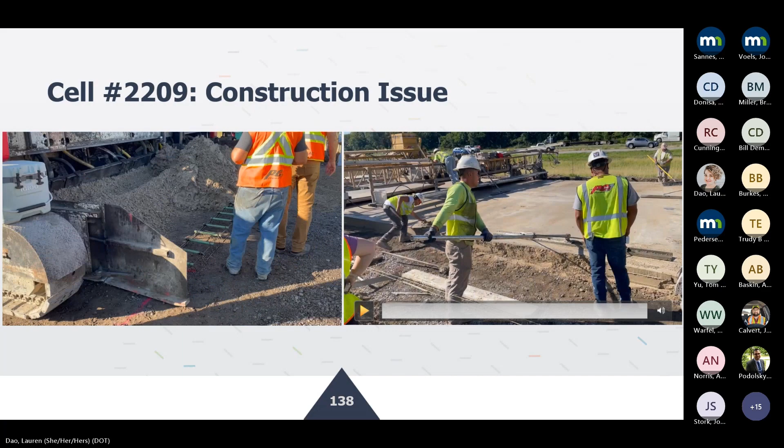All right, the next material was the Ashgrove blended cement, and similar to the ultra high materials, the initial batches were relatively dry, but then with subsequent deliveries it did improve. But one issue we had, not just on this project but the carbon dioxide and the alternative pozzolanic project, was the delay in getting subsequent mixes, up to 45 minutes to 1 hour wait time in getting the trucks from the batch plant to the site.

That was also a big issue with a lot of these mixtures. We did notice that this mixture was not blended very well, probably an artifact of the super sack issue. The material received from the manufacturer was not enough to finish the 240-foot test cell, so we had to backfill it with the control section, and the entire test cell was diamond ground for this particular cell, except over the panels with the sensors.

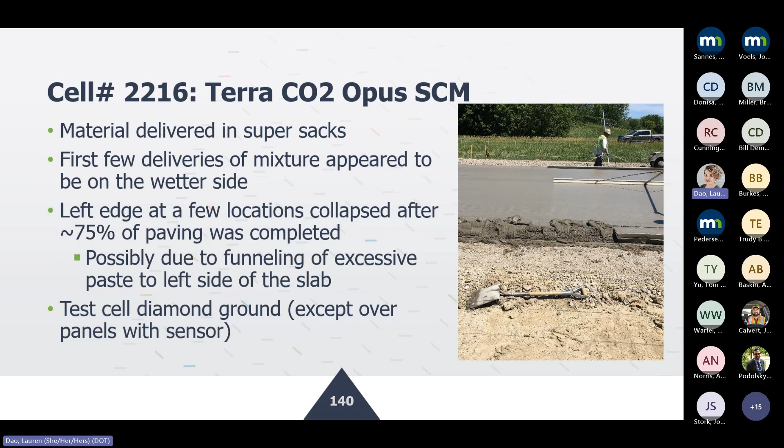And the next cell, 2216 Terra CO2, again super sacks, and not many issues with this mix, except once 75% of the paving was completed, we did see some of the edges falling apart. They did collapse, and then they had to be readjusted and finished after the fact. This test cell was also diamond ground completely, except all the cells with the sensors.

And the study control, you would not expect to see any issues with this particular mixture, as it has been used routinely. One issue that was noted was in localized areas we did see some excessive bleeding, and then we had to wait about 1.5 hours for all the bleed water to be sucked in or evaporate.

And then only then the curing compound is applied. That was the only real issue with this particular control mixture. And the continental cement, again, this was...

Based on what Larry said, he was there for this particular test. He did not note anything on his field sheet, meaning his mixture had no issues. Slump seemed acceptable, mix was placed properly, and this cell was not completely diamond ground. I think they left some cells unground just to see how the drivers might behave to that slick surface.

But anyway, some panels were diamond ground, and you can see the difference in texture before grinding and after grinding. If you folks are at the MnDOT site after the meeting today, you'll probably get to see a lot of these test cells.

In general, the one main issue with constructability was that a lot of these materials came in huge super sacks, and they take a lot of time getting transported via pneumatic tankers. This presents a potentially hazardous environment for workers, and you could also waste a lot of material with spills. A lot of these mixtures did have blending issues.

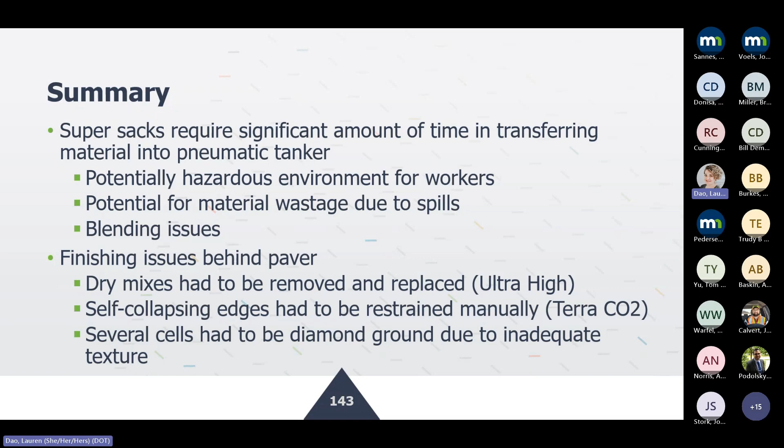I did have to note that. There were finishing issues behind the paver, and dry mixtures that had to be removed and replaced. There were also some self-collapsing edges that had to be restrained manually and refinished at the end. And as noted earlier, several cells had to be diamond ground to attain the desired texture.

We did go out there to look at these test cells last year for year one performance. One thing we saw in all the test cells was, about 12 inches from the outer shoulder, very minor spalling. Almost every single slab had that. We have a drone video showing that. Since every single test cell had it, not just this project but all 3 projects, it was probably something to do with maybe irregular panel elevations.

We thought that, but we put a straight edge on it and did not see anything out of whack there. It seemed to be okay. Maybe snow plowing issues contributed to it. We also hypothesized it could be due to an irregular vibrator at the paver, but we don't know the exact reason. We did see a lot of low severity spalling through the entire length of almost every single slab there.

And Ultra High materials, like I said, only 15 feet left - you might miss it. You have to carefully observe for this test cell while you're out there on your field visit today. Only 2 slabs, and again, it is there. No repairs have been performed since construction. The 2 slabs remain to this day, I believe.

Ragged joints, possibly due to the dry nature of the mix, and some areas of localized pop-outs and joint spalling. And then the Ashgrove blended cement - again, the recurring spalling we saw throughout the length of all the test cells was less pronounced in this particular cell. But then there was a large full depth repair, which I believe was because of a transverse crack near the middle of the test cell. We also saw some localized areas of shrinkage cracking.

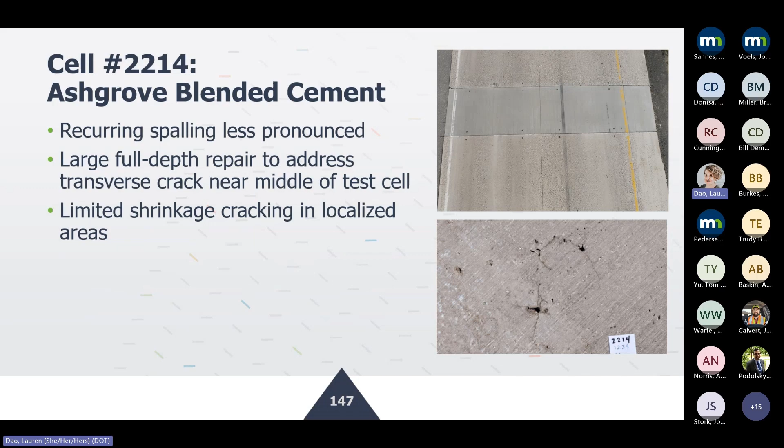And 2216 Terra CO2, same thing - transverse joints. In a lot of the transverse joints we see some low severity transverse faulting. There were some isolated areas of pop-outs. Other than that, no cracking, no shrinkage issues - seems to be doing pretty well after year 1. Study control, you wouldn't expect to see anything.

And this cell was not diamond ground - you do see the turf drag texture right there. We did notice that the first 4 or 5 joints were skewed, maybe at a 10-degree angle. I don't know whether this was done to intentionally mask dowel basket orientation, or the paving and sawing crew just wanted to have some fun out there. I don't know what the issue is, but we did notice that the first 4 or 5 joints were skewed.

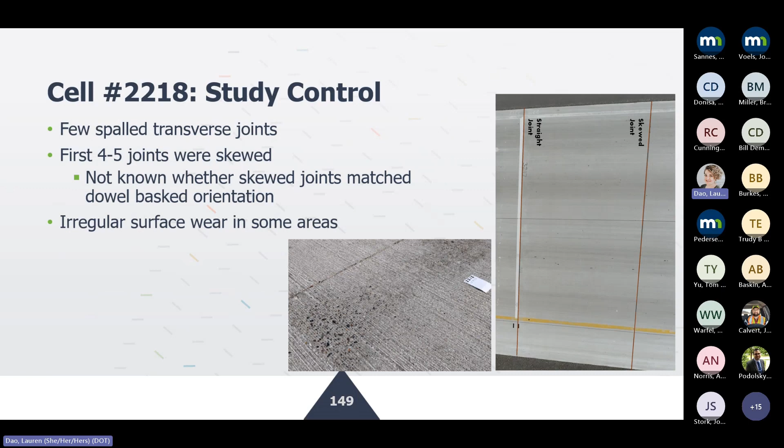I'm not going to show you all the test results, but I'll show you some testing performed after construction - these are some roughness numbers, ride quality numbers. Looking at the IRI values, you should take this with a grain of salt - these are 200 foot sections. We are not wanting to focus on the absolute values; what we are more interested in is how these trend over time. What happens to these test cells over time?

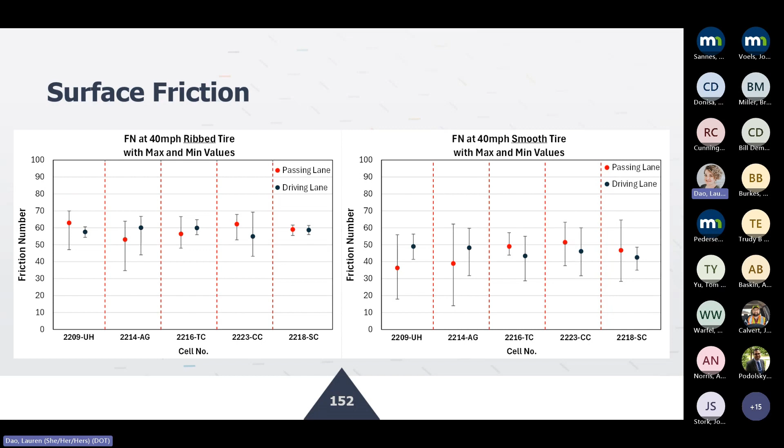These are short test cells, but looking at the IRI numbers, most of them fall between the 60 to 100 range, generally offering pretty reasonable ride quality. Obviously, most of these test cells were diamond ground. Surface friction values, again, no issues there. Most of them had rib tire and smooth tire testing performed, and you see most of these values hovering around the 60 range for the rib tire and the 40 to 50 range for the smooth tires. We're more interested in how these trend over time rather than the absolute values. Load transfer efficiency was also performed, and most of them are in the 70, 80, 85 range.

The testing was performed with load before the joint and after the joint, and there are some other additional statistics we reported. I think that's published on the NRRA webpage. You can take a look at that.

In addition to this testing, MnDOT did include a lot of embedded sensors. We have a lot of data coming in. I'm not going to show all that today, but probably in the next meeting or the one after, once we have data from years 1, 2, and 3, we can look at trends over time and show some observations from those sensors.

And year 1, what did we see? No significant signs of premature distress. Right after year 1, most of these testers are still there. Some isolated areas of pop-outs, a little bit of shrinkage cracking on a few panels, maybe one full depth repair on one particular test cell, one small patch. Other than that, no major cracking issues. Seems to be doing pretty well. Ride quality is good, friction numbers are in the expected range.

There was some limited petrographic analysis performed by AET, and most of the cores seemed to be in good condition. There were no signs of freeze-thaw damage or ASR damage. But one thing they did note was carbonation at depths exceeding typical expectations for 1 year. One year after construction, you'd expect maybe 1 millimeter of carbonation, but they saw carbonation at depths of 6 to 7 millimeters. Maybe due to diamond grinding, or maybe due to inherent nature of these mixtures. But only one core was tested, so we should take the results with a grain of salt. Really, nothing to say these mixtures have any durability concerns.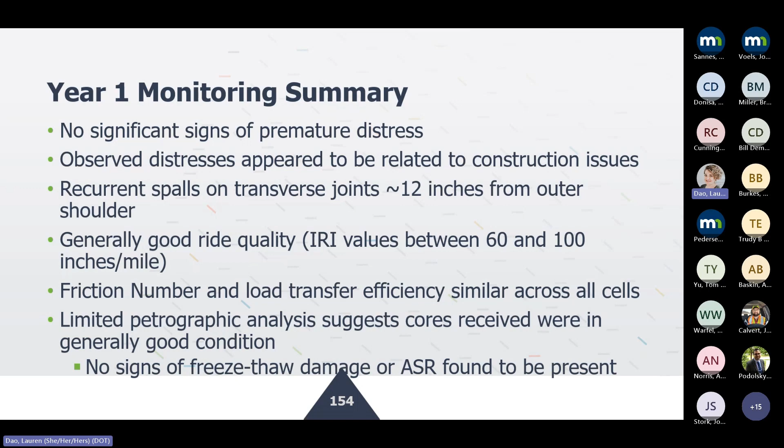In terms of next steps, we will be doing year 2 monitoring this year, possibly combined with the ISCP conference. I think Thursday is reserved for field inspections, so we're looking to combine our field inspection, our site visit, along with that. And then we're also working on task 7, the sustainability evaluation.

We did survey the material producers as part of the study. What we wanted to get was whether they've done any environmental analysis, conducted a life cycle assessment, or have an environmental product declaration for their mixtures. Some of them have done life cycle assessment studies and have information on global warming potential for these mixtures. That's the type of information we're trying to obtain.

Some of them said they're in the process of developing EPDs for their mixtures. We've also developed system boundaries for life cycle assessment for these particular test cells we're evaluating as part of this project, so we can look at material manufacture, transport to the plant, and plant to site. We're going to look at a simplified environmental impact analysis, and we're planning to reach out to the producers again to develop more informed assumptions for the life cycle assessments conducted as part of the study.

And that's it. And with that, I leave you with a poem my daughter wrote last week on climate change.

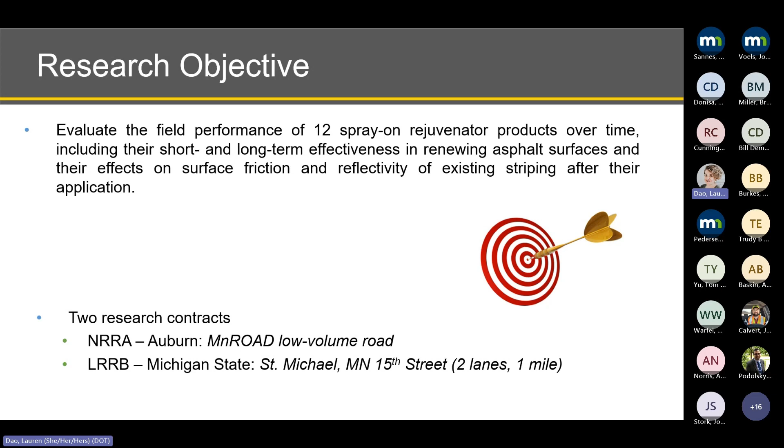One is between the NRRA and Auburn University, focusing on evaluation of sections constructed at MnROAD, and another sponsored by the LRRB being performed by Michigan State University, focusing on field characteristics of sections at St. Michael road and MnROAD.

Here you have a picture of the project location at MnROAD, a low volume road. We have two surface mixtures constructed in 2021, containing 20% RAP. The basic difference between these two mixtures is the asphalt binder used: one has a PG58S-28 binder, and the other surface has a polymer-modified binder, PG58H-34. On each of the surfaces, we have 12 products being applied.

Here is a list of the products used in this experiment. They can be divided into 3 major categories: bio-based products, a hybrid combination of bio and petroleum-based components, and petroleum-based products. Among the 12 products, 5 have polymer in their composition.

In the third column here you can see the residual application rate of these products. We emphasize that all the properties for application of these treatments, including the residual application rate and residual oils, are all indicated by the manufacturers. For discussion of the results, I'm not going to give names to the products; they'll be randomly labeled between product 1 and 12.

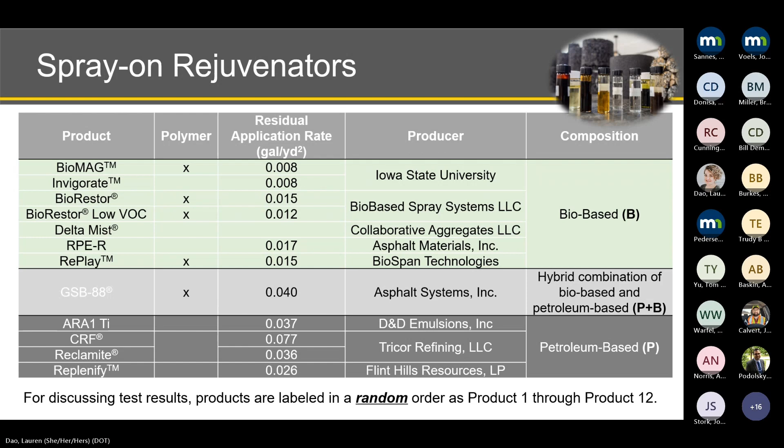The work plan is divided into 3 major steps. The first is field evaluation, where we monitor friction, reflectivity, macro and microtexture, and also collect field cores for binder evaluation.

For extraction of the binders from the field cores, we are aware that the solvent used in the process can interact with the treatments we are using. So we asked the producers what would be the most appropriate solvent for extraction and recovery of their product. Three of them requested a blend of toluene and ethanol, and the majority of producers required trichloroethylene. The control binders are also extracted and recovered using trichloroethylene.

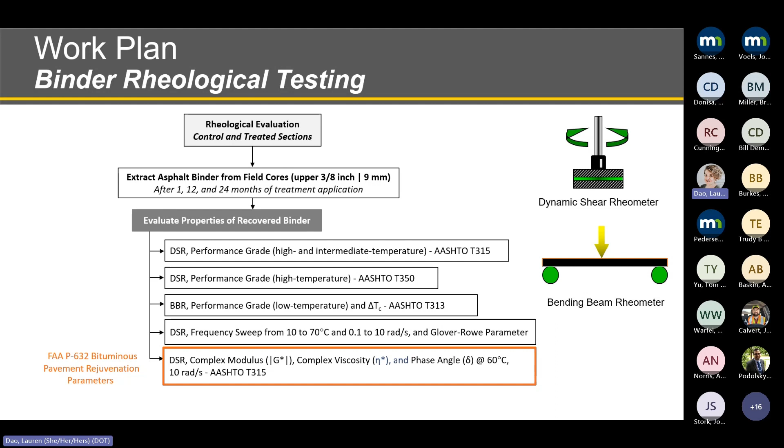For binder evaluation, we performed the tests listed here, basically DSR and BBR testing. As mentioned before, the current specification used for evaluating these products is the P632. On the P632, there are 3 major parameters accounted for regarding the binder rheological response. To not only look into these 3 parameters, we added other tests for evaluation of the extracted binders.

The third step of this study is the chemical evaluation of the treated asphalt binders, where we performed FTIR to evaluate oxidative products, and also the SARA fractions to see how these treatments can change the chemical fractions of the asphalt binders.

I'm going to now start discussing the results. For today's presentation, due to the limit of time, I'm going to focus only on the rheological response of the binders and some results for the chemical analysis. I will not be covering the field data for this study because the team from Dr. Kutay from Michigan State has been presenting that, and due to time, I cannot cover everything.

Before we discuss the results, I would like to highlight that neither NCAT nor MnDOT have any interest in any of the products evaluated in this study, so there's no bias in any of the results presented. Second, and most important, all the binder data presented here are originated from extracted and recovered binders. Because of the solvents used in the treatment, we can have interference in the response of the data. It's very hard to account for that, but we have to keep it in mind.

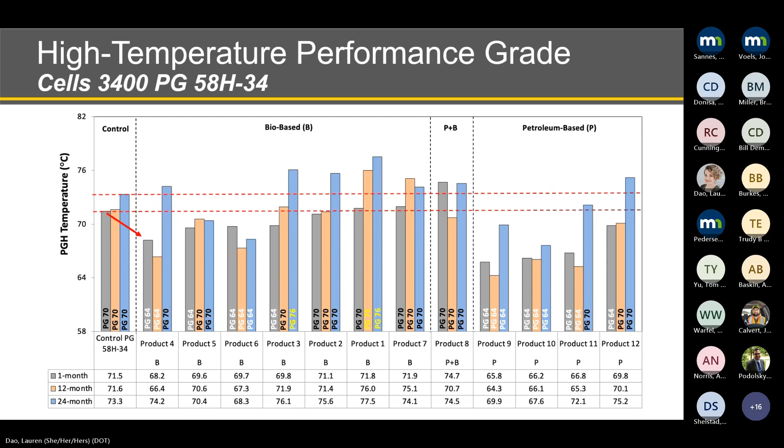In terms of delta TC, as observed for the PG58S binder, we can see that the petroleum-based additives are the ones that give the best improvement on it.

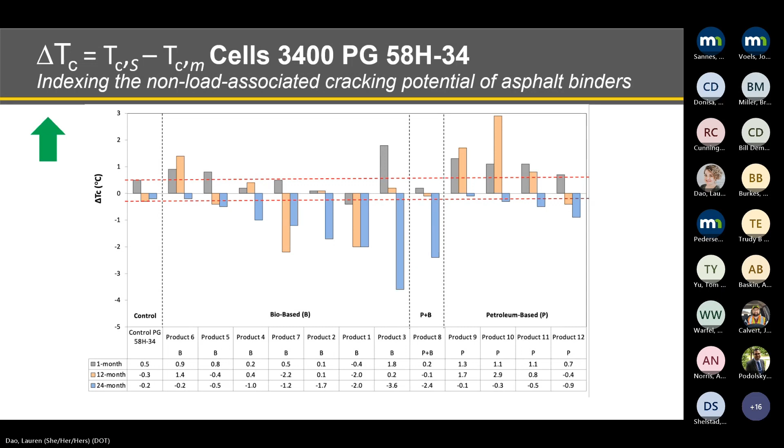So trying to summarize what was presented in terms of the effects of the treatments on the delta TC of the binders, a ranking was established, just for us to try to see if what was captured can facilitate us when ranking categories of products and their effects on reducing the cracking potential of binders.

So you can see here the difference between the delta TC of the treated sections and control sections after 24 months of being applied to the field. The first set of data is related to the surface with a PG58S-28 binder, where the second one is the polymeric binder 58H-34.

You can see by the color coding that for the 58S-28, the products that are more effective in improving the delta TC of the control binders were the petroleum-based ones. And for the polymeric base, we had a mix, with the best products being petroleum-based and bio-based.

The same ranking was established considering the effect of the products on the low temperature PG of the binder. We know that delta TC has a meaning only when we are considering the stiffness of the binder reaching 300 megapascal, so we also have to consider the effects of these treatments on the low temperature PG.

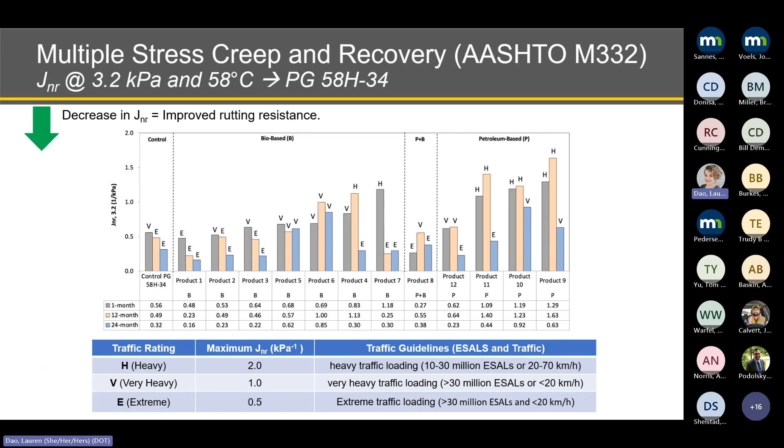Regarding the parameter used by the P632 specification, we have stiffness at 60 Celsius degrees and 10 radians per second. Per the FAA specification, if a pavement is less than or equal to 3 years old, for a product to be classified as effective, this stiffness needs to have a decrease equal to or higher than 25% between the time interval of 30 and 45 days after the product's being applied.

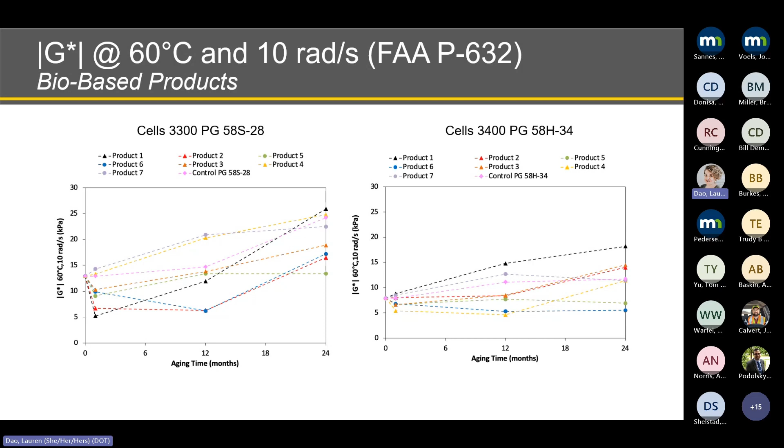Same comparison now considering the bio-based products, where on the left side graph we have results for the PG58S minus 28 binder, and on the right side the PG58H minus 34. Again, we see that the response of these products differs based on the binder present on the surface of the pavement, and what is captured after 1 month is not really the actual response of the long-term performance of these treatments.

Another way we tried to evaluate if these products are effective at decreasing stiffness and embrittlement of the base binder was using the Glover-Rowe parameter. We created a Glover-Rowe effectiveness index, using the Glover-Rowe parameter of the treated binder from field cores collected after 24 months of field aging, divided by the calculated Glover-Rowe parameter of the control binder also after 24 months of field aging. Basically, we want to see the effectiveness of these additives on changing the embrittlement and stiffness of the binder, so we want these results to be lower than 1.

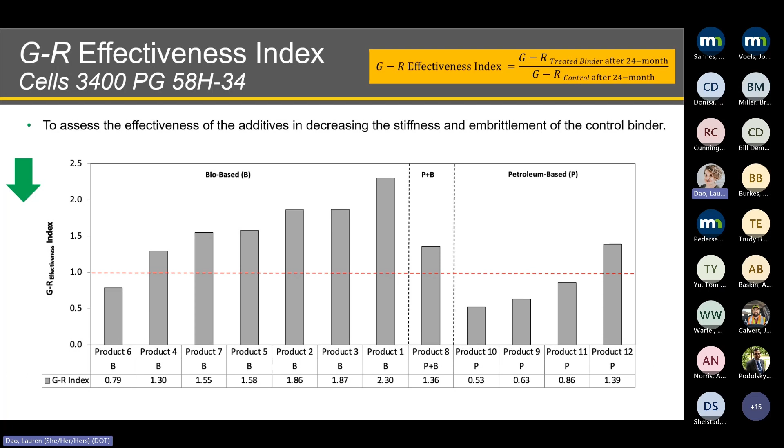Regarding the chemical evaluation of the treatments, as mentioned before, we did the separation of the 4 asphalt fractions. With those fractions, we calculate the colloidal instability index - basically we wanted to see the components that must be dispersed divided by the dispersing components of the binder. We wanted this colloidal instability index to decrease, meaning our asphalt binder is more stable.

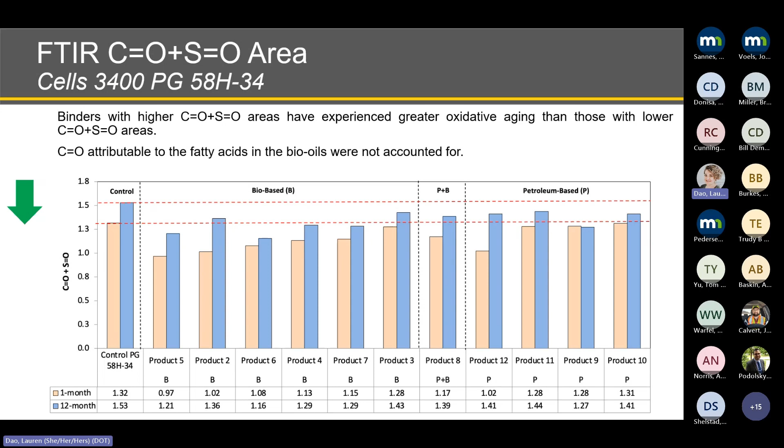With this approach, we can capture that all of the products are reducing the aging of the binder between 1 month and 12 months of field application. The same evaluation was performed here for the PG binder 58H minus 34, and we can see the same trend.

Key takeaways of the study.

The database that we are creating for this study is very large. You can see for each of the tests performed in this study, we have 84 samples being evaluated, considering the 2 surfaces, the neat binder and the polymeric binder, the 12 products applied on each of the surfaces, and the 3 field aging conditions. So the database is huge and is being used to feed an NCHRP study that is being performed right now.

to establish specifications for classifications and acceptance of these products. From the data collected in this study so far, we see a decrease in the continuous grade of the extracted binders at high and low temperatures, indicating the softening of the treated sections. We also see that these treatments improve cracking resistance, as indicated by the delta Tc, even though after 24 months of being applied, a longer period was required for some treatments to achieve maximum performance, especially when considering the surface containing the polymeric asphalt binder. So therefore, the window of 30 to 45 days after the treatments being applied can be misleading. And the chemical analysis performed so far has indicated the benefits of these treatments. This project has not been finalized.

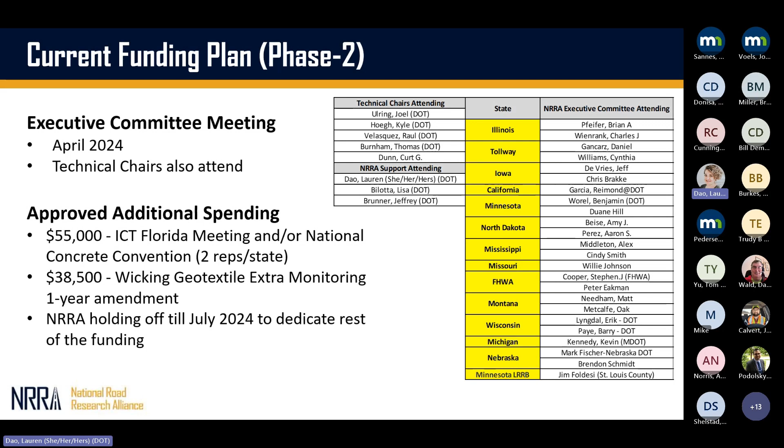The other thing too is we had the Wicking Geotextile, talked a little bit about in the Geotech group. That one's got an extension on it, so hopefully we get a winter this year and they can see what happens with that. And also we kind of looked at what kind of money we had available, and thought - I put this on the slide - but really we're looking at holding off till 2024, later on in July, to figure out what we want to do with the rest of our funds that we have.

Bear with me one second. I'm going to go up, go down. All right, I guess I'll go.

So I guess when I talk about the rest of the funds, we have some flexibility in what we want to do this summer. We want to get things contracted fairly quick, just so we can kind of get it in phase 2. But we're kind of seeing what this conference brings about, see what the teams talk about it in a couple months here up till July.

But again, the executive team really looked at MnROAD construction. They were wanting support, we were kind of talking about that. We have funds that we can use on our interstate road, but we can't use it on the low volume road. So when we want to start incorporating maybe some test sections there, we could really utilize that. So the executive committee was in favor of that. We just didn't put a dollar value to it right now.

Again, they really wanted the idea of implementation - how can we foster that, how can we put dollars towards that and move forward? And again, we're looking for the teams' input on some other things too. Raquel talked a lot about her aging testing, maybe we need to go farther into that for more years. Lots of different things that we could maybe look at.

Again, I want to do the thank yous, a couple different things. All the NRRA members, the associates, the agencies. I also wanted to say a lot of great work is being done at MnROAD. You'll see some of those people that aren't necessarily in front of the microphone here, but they're doing all the hard work. They're the ones doing really interesting things with sensors, really going out there and measuring stuff when it's cold and windy and rainy. So thank those people out there - they do the great work, getting you the data that supports a lot of these research efforts.